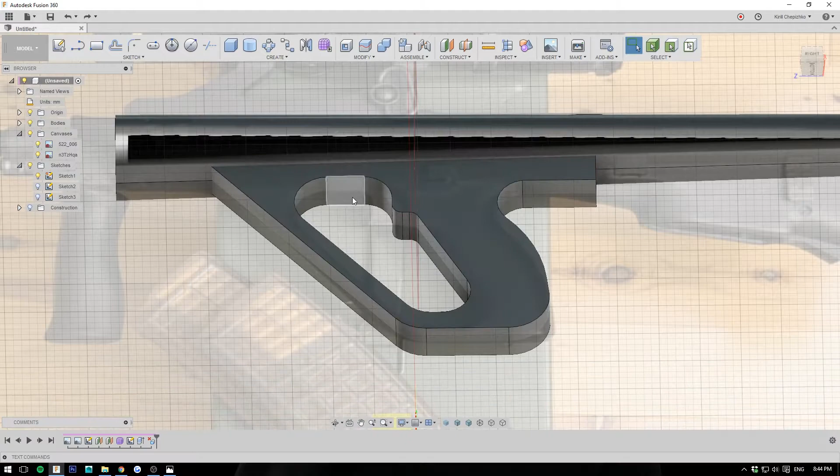I rebuilt part of the sketch because I had too many lines in it and it wasn't letting me fillet it. So we're just going to fillet the outer part here first.

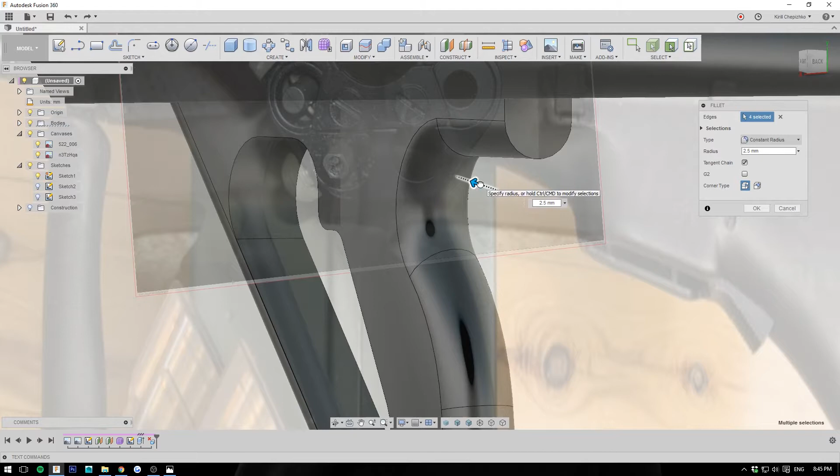Just leave a little line like this. And then we're gonna fillet the inner part to get a slightly better shape, slightly more interesting shape there. Maybe we actually need to do that first.

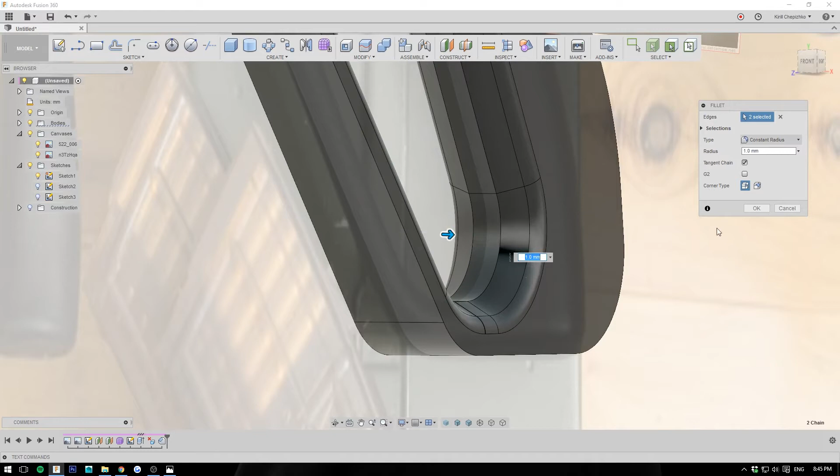One millimeter seems to be too far, but 0.1 is definitely not enough. So as it's calculating, if the operation is bad, it's going to take a little bit to calculate, which is annoying.

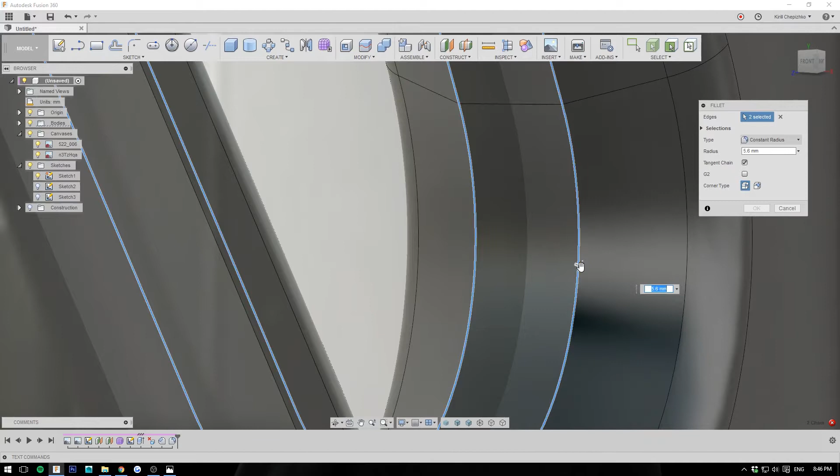This should be fine. So as long as it's more or less smooth, I think we're getting the shape that we need. And then let's go ahead and fillet the outer part.

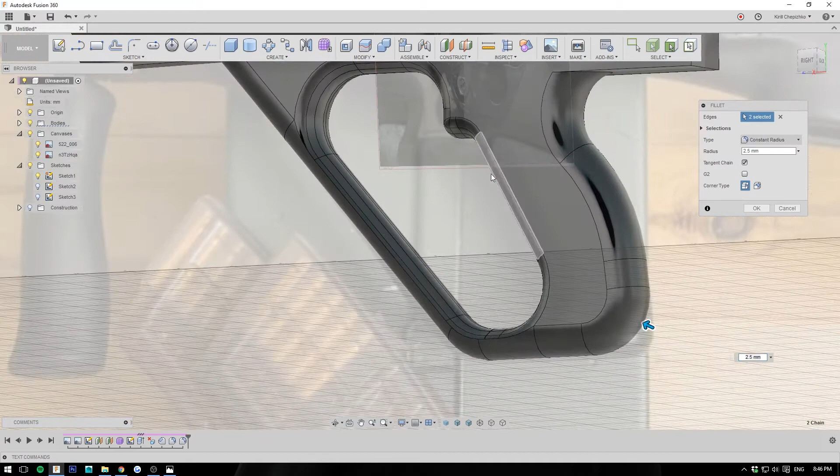Which, as I'm filleting, I'm getting this coincidental edge. And I think it's more or less like a design feature rather than an unnecessary thing. So sometimes you can actually play them to your advantage. You get the sharp edge right here.

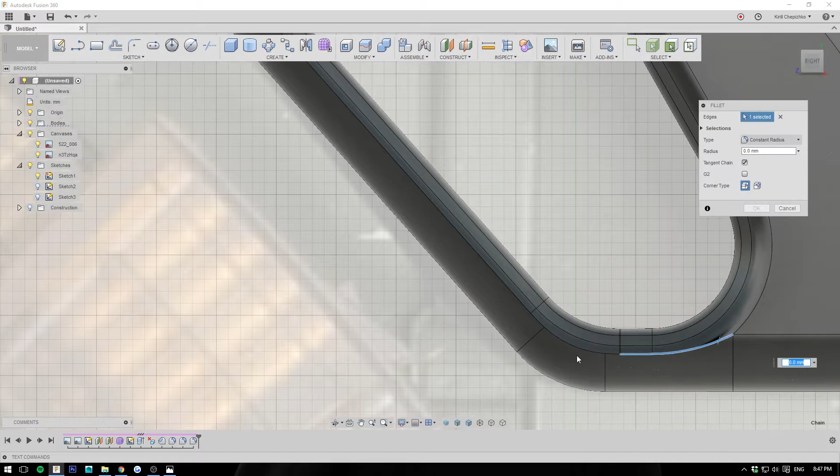And I can choose to either also fillet it, like that, so everything is going to be smooth, or you can choose to chamfer it, which sometimes gives an interesting result.

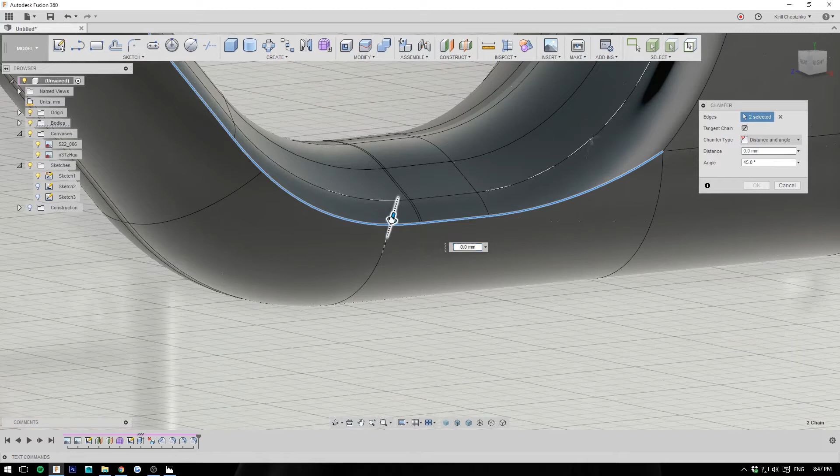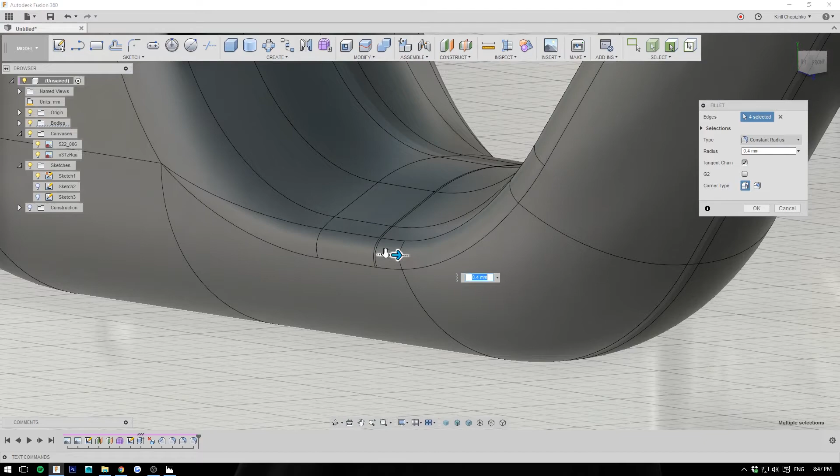Or in this case, it doesn't want to chamfer it, so I'm not going to keep it sharp. I'm going to add a fillet on both sides, just a little bit, to get rid of the sharp edge.

So this way we have the lower part of the handle. We also need to, let me turn off the canvases. Sometimes they just get in the way.

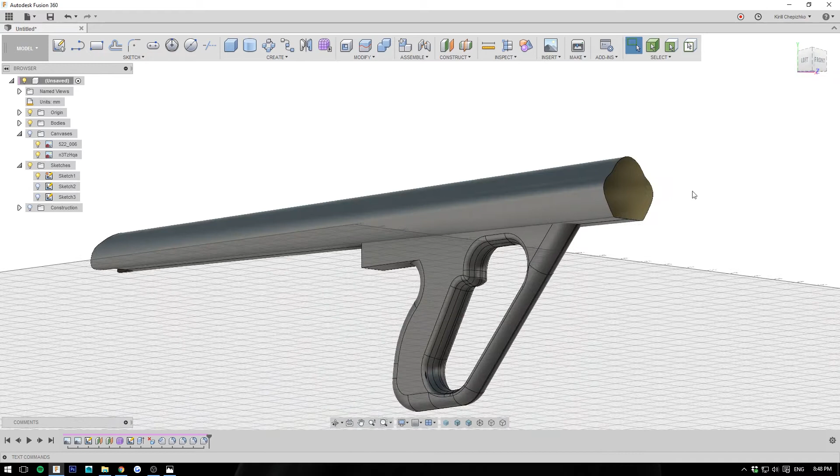For this, to turn this surface into a solid body, you can either right click, add thickness. Sometimes it won't let you add inner thickness, so you'll go for outer, like this. As long as it's a solid body, you're good.

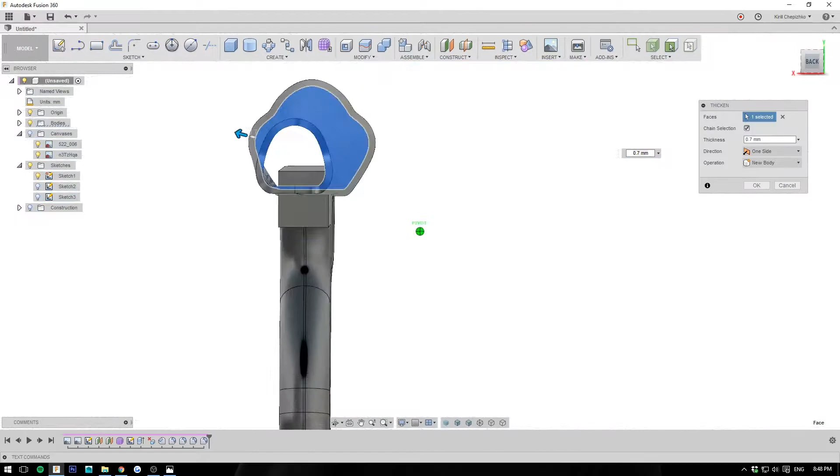Or go back, switch to patch. You can just patch these.

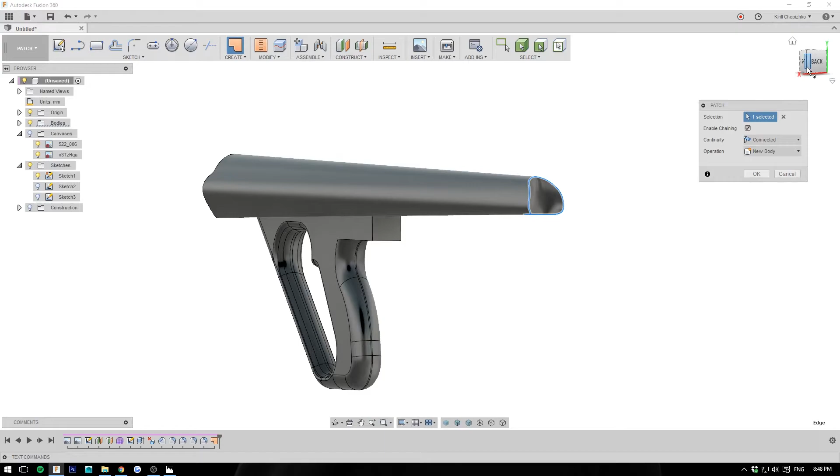This, as you can see, is not actually on the same level. So that mistake needs to be fixed in the sculpting.

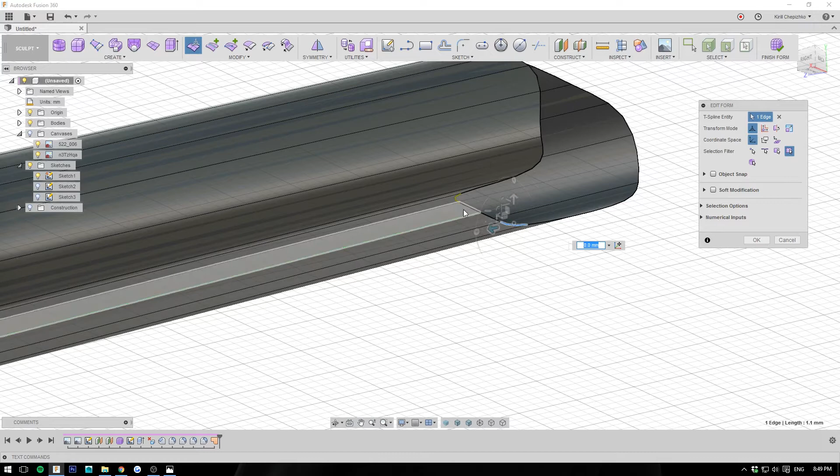This is much better, so hopefully it will update. And then switch again to patch. Create a patch here.

More than likely we'll just cut it off, so it doesn't matter. And then create a boundary fill right here. Select all the surfaces that are forming that boundary.

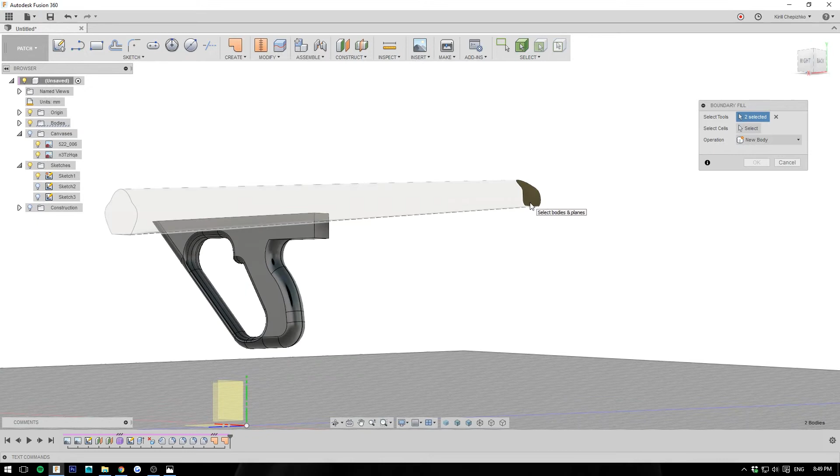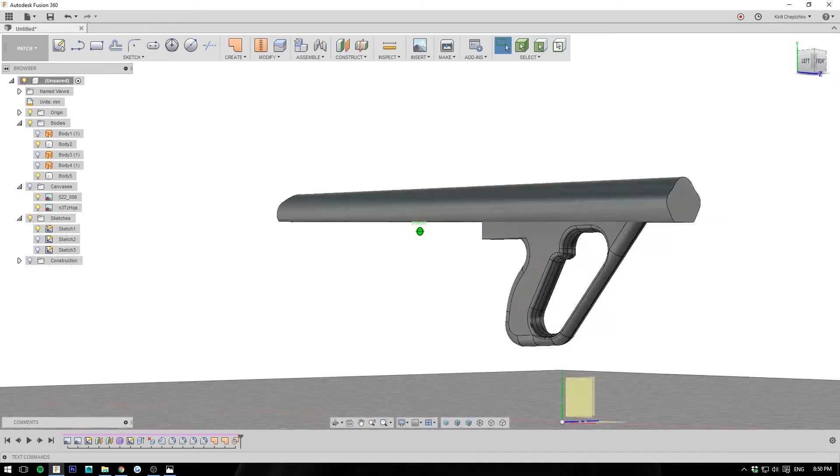Then switch to this. As soon as it's green, it means you have some kind of volume, a closed volume. So this is what we're looking for. It gave us, we can now turn off the surfaces. We can keep them to come back to, but this gave us a solid body instead of a hollow one with wall thickness, this is a solid one.

Just want to check, go back to modeling, of course. I want to check how this blends in together on the bottom. Hopefully well.

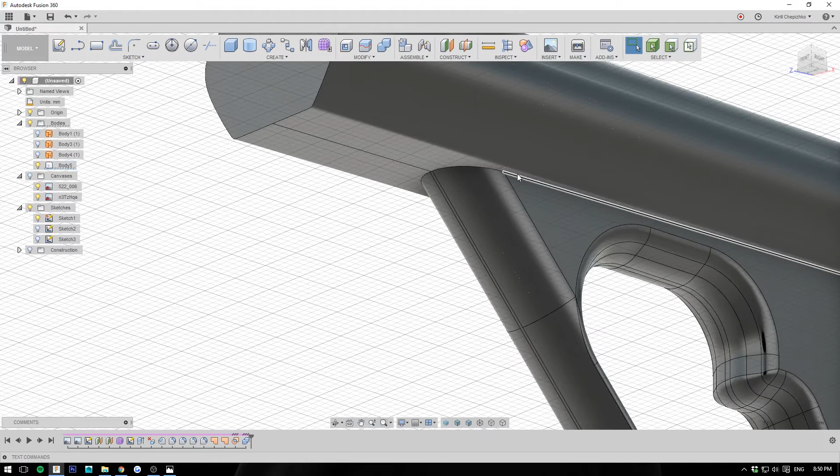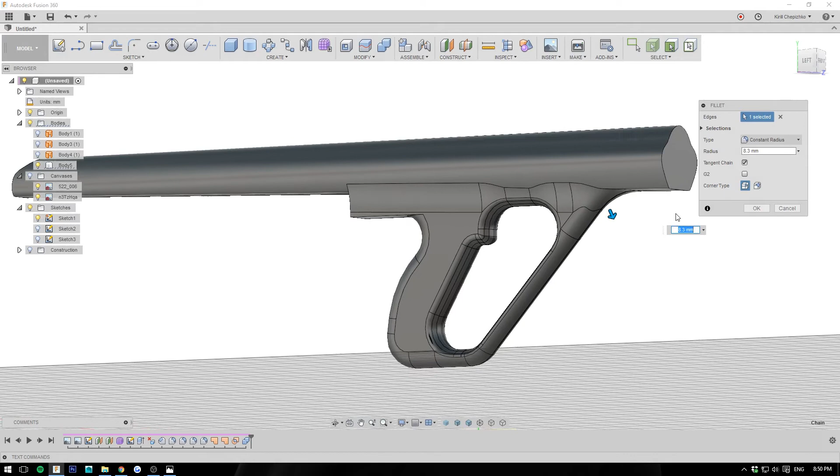This should be definitely good enough for that rifle. As long as it starts to look like one solid flow, we will basically hide all the mistakes and stuff behind the details, so it's going to be hard to identify what's going on.

So this works. You can check how far you can push it actually.

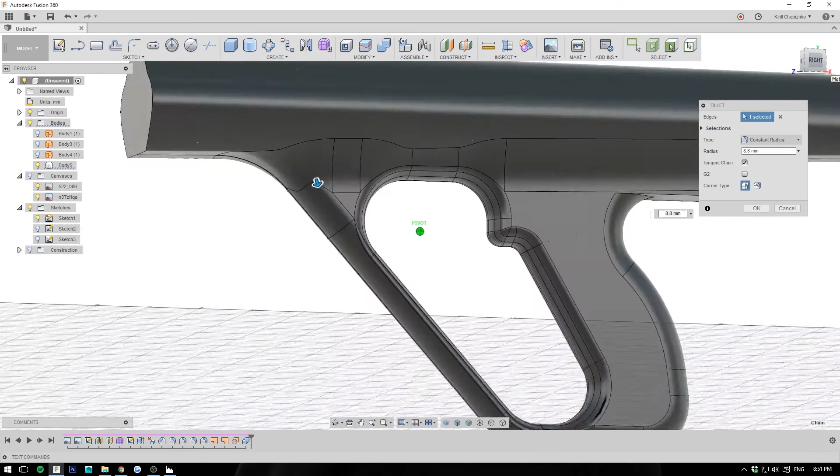But before we do that, we will need to do the butt part the same way we did it here. So we're just gonna, I'm gonna pause and do it and then come back to it.